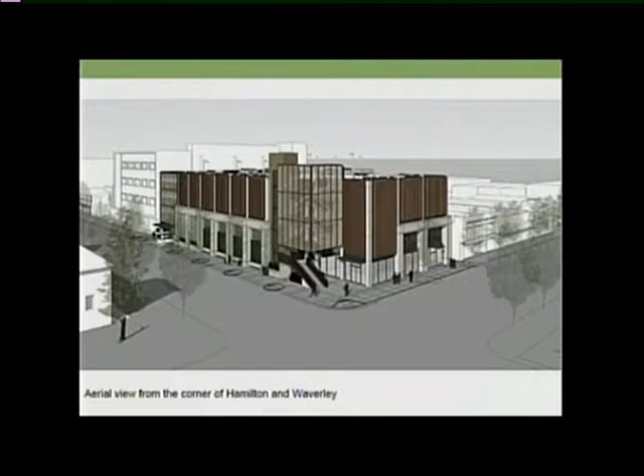And so this is the architect's design for the parking garage that was presented at the last ARB meeting on February 15th. The design, just so you know, is not finalized, it's still in flux. So this is where it stands at the moment, right, just to clarify. Right, and I'll explain a little bit more about that.

This is a different view from Hamilton Avenue, and from Gilman, looking at the vehicle entrance there. And this is, I think, a future potential inclusion of photovoltaic panels, which will not be part of the complete building when it's done, but it's planned for the future.

Who's the architect? Ken Hayes, yeah, in partnership with... God, now I'm blanking, but is it Watry Design? Watry, yeah, Design.

So the project goals for the public art for this building are to integrate artwork that reflects the character of the downtown corridor and increase wayfinding.

So after an artist selection process, Amy Landesberg was chosen for this project. I should say, going back to the previous slide, though, for a second, please, and back one more.

At the February 15th ARB meeting, members of the Architectural Review Board thought that this design was too uniform. A couple members referred to it as looking like a prison. They thought it was too vertically linear and very uniform, as if it was all one big block. They wanted the perforated screen to be more beautiful and more complex, and that's where the public art can help.

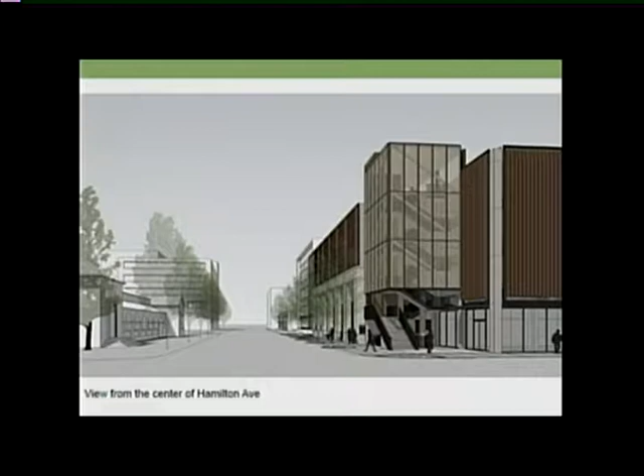Where the AT&T building is, right next door, that's that alley where... which is this building. Another comment by the ARB was that the vertical staircase, the enclosed staircase, was too large.

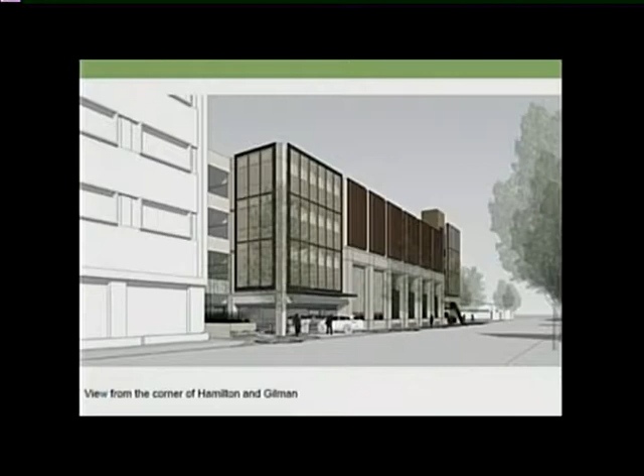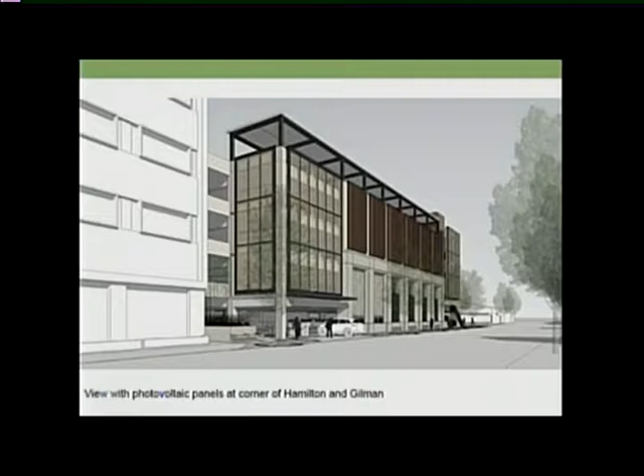And so this is potentially going to be reduced in size. They intend to reduce that in the next iteration of the design, but that hasn't happened yet.

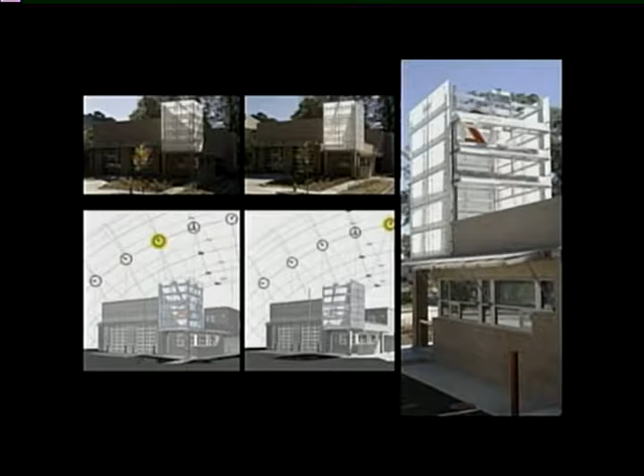So Amy Landesberg was chosen to be the artist for this project, and we have a few examples of her previous work, which shows her use of sunlight as an element that changes and animates her work at different times of day and also different times of the year. Her work will look different depending on how the sun hits it.

Also showing here in this piece her use of patterns, using man-made materials that mimic movement and patterns in the natural world. These are the Hyundai taillights, right? Yeah, this is a rental car parking garage at the San Diego airport.

So next, we're going to show you her conceptual design for this downtown garage project, which she entitled Tapestry. She's put a lot of work, a lot of time and effort into developing her design.

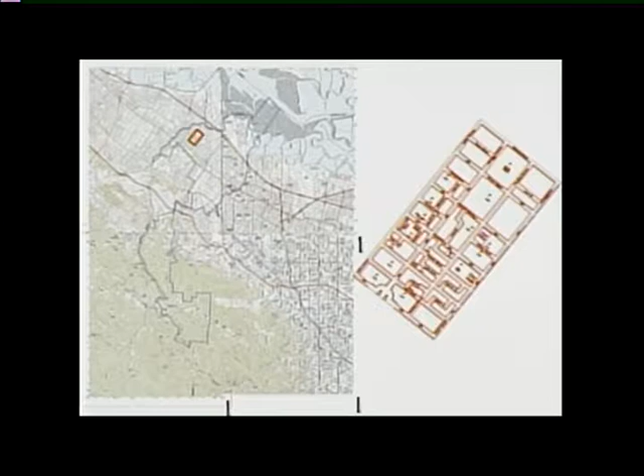I also just want to clarify, as we go forward with the renderings, they're concept renderings, so they're sketches. There may be more elements, fewer elements, but it's really just to present the concept. I just want to throw that out there as well.

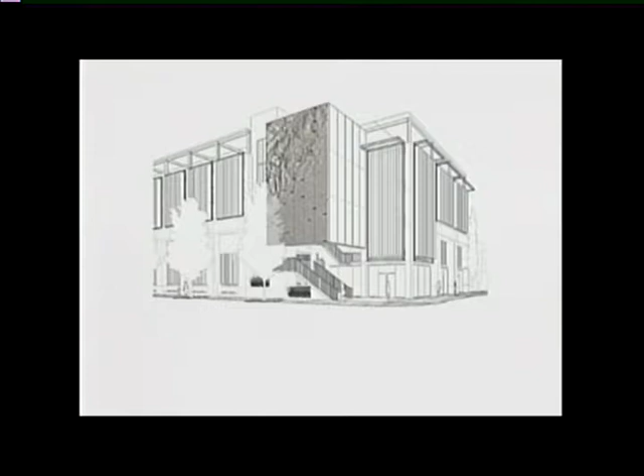Elise and I requested that she somehow make this more unique to this particular site, to the city of Palo Alto, which I think she's successfully done.

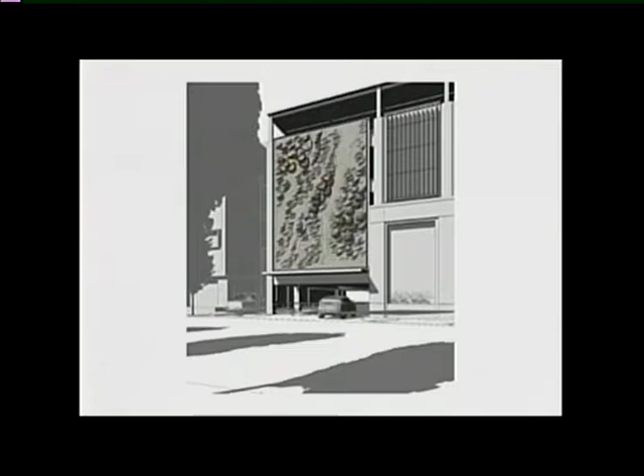And so here they are above the vehicle entrance and above the staircase in both views, and then finally wrapping around the enclosed staircase.

We really feel like this breaks up those vertical masses that the ARB objected to, making those oppressive lines something much more complex and beautiful, which is something they specifically requested.

I feel like it stretches her budget of $190,000 really far to cover this enormous area, and provides wayfinding in terms of making this a really unique, distinctive, recognizable building.

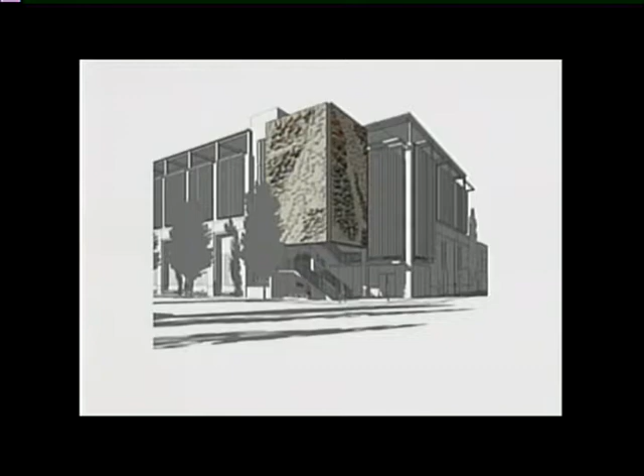So what we're asking this evening, keeping in mind this is a sketch—the number of elements may go up or down as we get into detailed design and get all the estimates, and see how much of the construction budget we might be able to leverage to help with the art.

So we wanted to bring this to you for approval to move forward with more detailed design, and to gather any input or feedback that you might have that we can carry back to the artist as we get into more detailed design.

Is this Cal Ave? No, this is on Hamilton. This is directly across from the post office building, next to the AT&T building, and there's the church on the other side, which, when Amy went into it and saw the stained glass, inspired her to want to incorporate glass into this project.

I really like her design. I think it ties together the wayfinding they were talking about with the maps, and I think she did a really good job on the maps and how to put them up there, and the colors and stuff, so it's gonna be visually striking.

One question I have though is those fins - can something be done with those fins artistically? Can they be movable, something? Are you referring to the fins on the other part of the building? Yeah, those brick red fins - because of the constraints of the building, and there are other adjacent buildings right behind it, it has to be open, otherwise it has to be mechanically ventilated, which drives up the cost significantly. So some of that is to mask some of the parking.

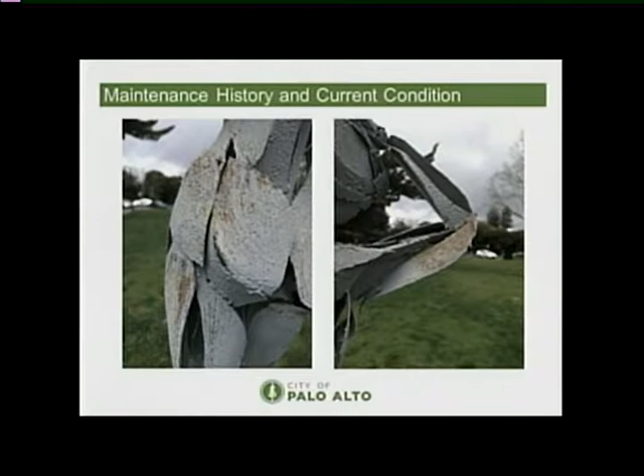So we reached out to a contractor whom we worked with in the past on a similar project and obtained a quote of $7,000 to install a new modern drip irrigation system and install new landscape around the piece. And here are a couple more detailed shots with affected areas. This slide shows that triangle which will be modernized with a new irrigation system and a new landscape around the piece.

So today we are here to ask the Commission to approve funding for this irrigation landscaping project. Thank you.

I was just gonna add that if you notice the light there, the light has been an issue because they try to mow that area and they always hit it with the mower, and we have to get electricians out there to rehook it up. So by putting the new plantings in, it will end that cycle as well.

The light will be protected as well, and we'll work to install a new light fixture in front of the sculpture. Okay, so new plantings, landscaping, new light fixture, and then also we're conserving the piece. Is that in that bid as well? So, right, the scope of $7,000 covers just the new irrigation and landscaping around the piece.

Currently, we are reaching out to a number of metal conservators and professionals to provide us with a quote for the conservation project of the piece, but that budget will be much lower, much smaller than this ask. Okay, and what did we pay for the piece back in 86, or was it 76? 76. I have to consult with the archives.

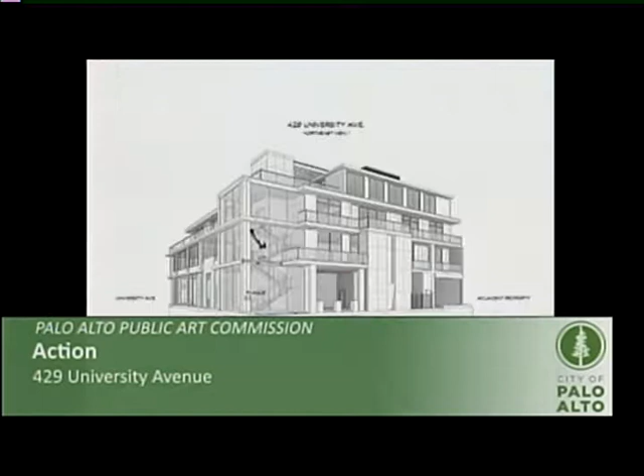Does the retail wrap all the way around from Kipling through University? Not all around. It goes up to that portico, which is the entrance, the lobby to the offices upstairs, as well as to the elevator going up to the apartments. So the retail stops at the portico.

So it does wrap around the corner a bit, like the first third of the building? Exactly, maybe a little more than a third, maybe half.

How did you decide on the placement of the piece, to do it there as opposed to closer to the entrance on Kipling? Well, here's the deal. First of all, University Avenue is kind of out, the real estate is just too expensive to do anything there.

So there were two choices. When you attached it, you attached it above grade, and that was a tricky move. The other option we presented the artist with was a balcony right above the portico entrance to the building, and we suggested he could put something there if he wanted. But he wanted something more open, less constrained, and he loved the corner because it's open - it's great, so the piece can take flight from there.

In fact, he called the piece Avigation, which he thought was reminiscent of aviation, navigation, finding your way, discovering new things.

So if we're okay with the location, then we can go back to the views of the artwork. I wanted to see the picture of Albert first.

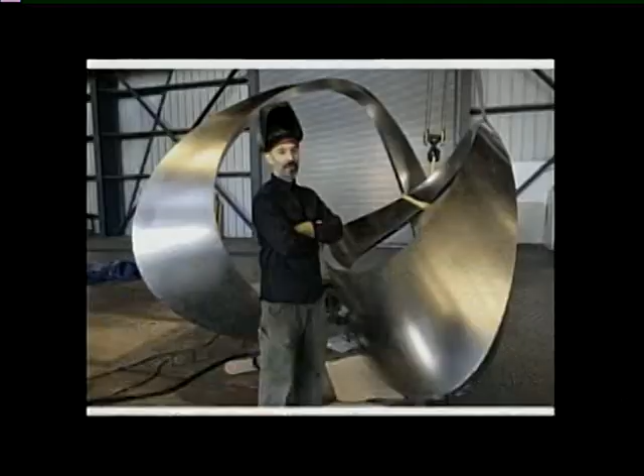This guy's a character. We discovered him because we originally approached Bruce Beasley, who I think you're all familiar with his work here in the city. Bruce was game in the beginning, but then he thought about it further and said, I'm going to decline, but I can recommend Albert. Albert apprenticed with Bruce, so he knows the Bruce Beasley techniques, but he has his own style - he loves to do 3D modeling on the computer and stuff like that.

That's our artist. He likes to make shapes with metal, steel, bronze, aluminum. Okay, now let's scroll down to his work.

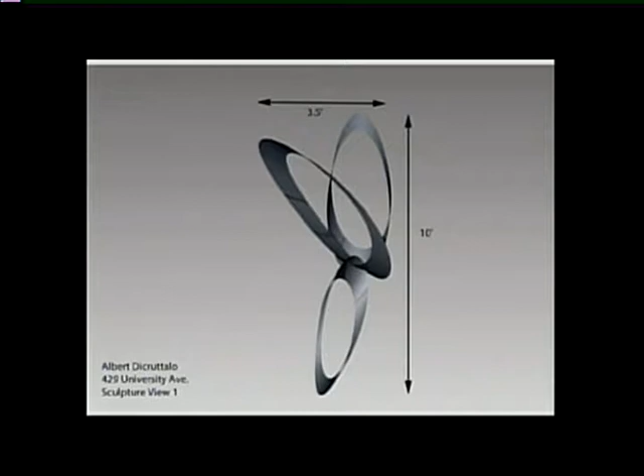So that's our first view of the work when the artist presented us with it. He said, I'm looking at interlocking wings with holes in them. And I said, well, that's interesting, how big is it going to be? He said it's about larger than man size, it's going to be 10 feet tall, and it'll be impressive in the corner, especially as you walk closer to it.

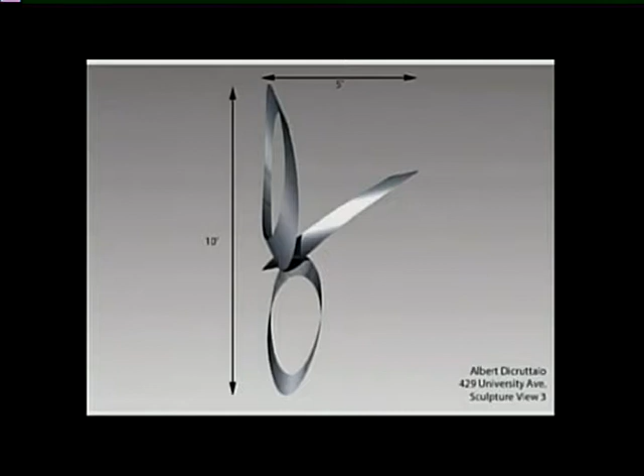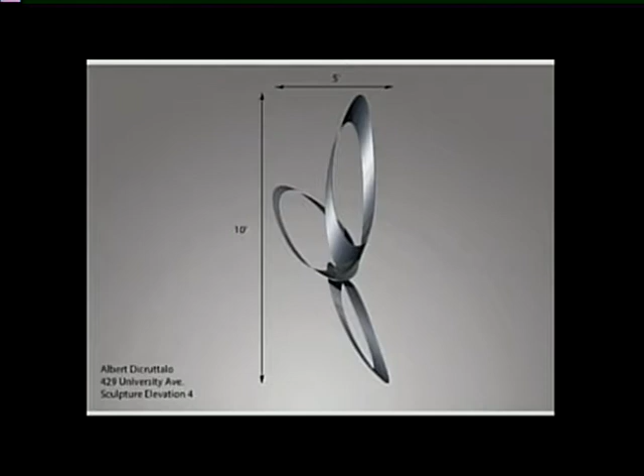And if you're going to suspend it in air, you can see it from all the way around as well as from the bottom. As an added bonus, people going up the stairs can see it from the windows also and get a different view of it. The other nice thing about the location is that stairwell is going to be lit up all day and night for safety, so there will be a glow from that jewel box onto the art piece.

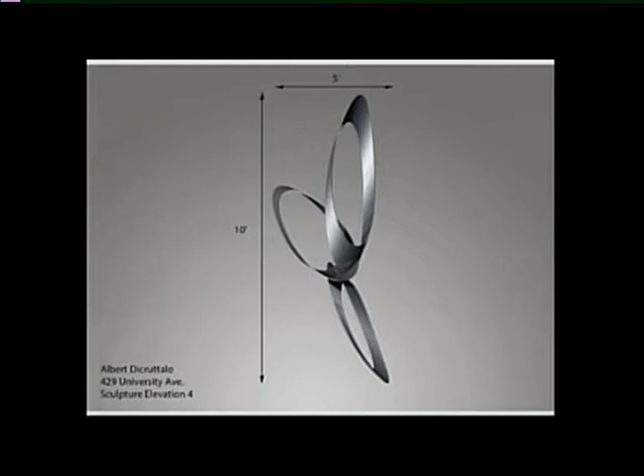It'll be casting shadows on the street as well. This corner, because of its location, will get afternoon sun and a little bit of morning sun, depending on how big the trees grow and exactly where they're placed, but it'll get quite a bit of afternoon sun. So that was the thinking behind the art piece and the location.

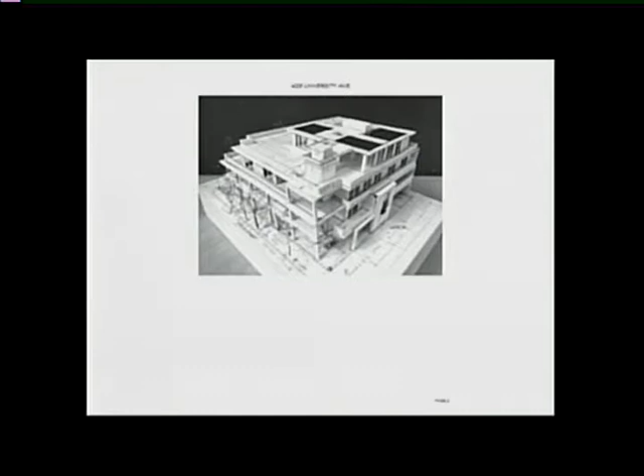Any questions about that? It's not still clear to me the exact orientation of it. I'm guessing that Albert hasn't worked that out yet, but he will - how exactly, which piece sticks out where. But that's the idea.

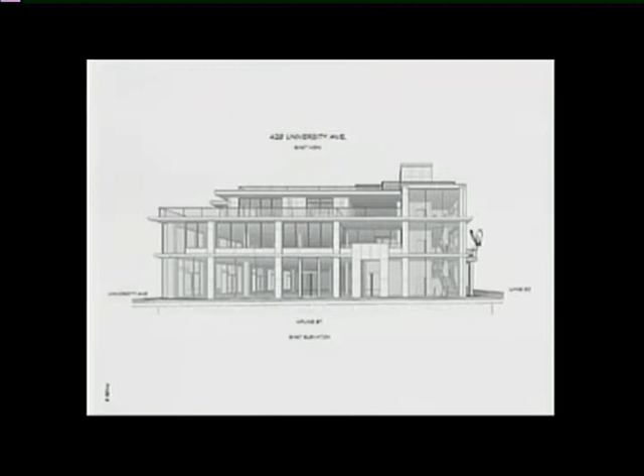As far as the colors go, the first and second floor have integral color concrete. The third floor and above will have a different color, so it's sort of an architectural bump, a feature that says here's one function, and then here's something else that recedes a little bit, is set back, with a different color and a different function.

I'm thinking this building is gonna be a lot different than a lot of the buildings, although things are starting to change in downtown Palo Alto.

That is correct. But I feel like if this was meant to be a destination, like how would the artwork work, if you were to say go to this piece, or meet at this place. I'm just kind of overthinking it, like meet at the red ball, or the gigantic red balloon. I think this could potentially be something like a destination, but what is that destination? I don't quite see it yet.

My initial feeling is that the building itself is artwork. This is a building that has no pretense, there's no layering, it's very honest. The concrete is the structure, there's no sheetrock in front of it or anything like that, no stone cladding. The glass allows you to look in and see the bones, see what's going on inside. I think the artwork punctuates that because it says, look, I'm taking off from here, I'm different. The building is all straight lines, all concrete and steel, and I am soft curves, I'm not solid, I'm in motion, that sort of thing. It punctuates the transition between University Avenue and the rest of the block.

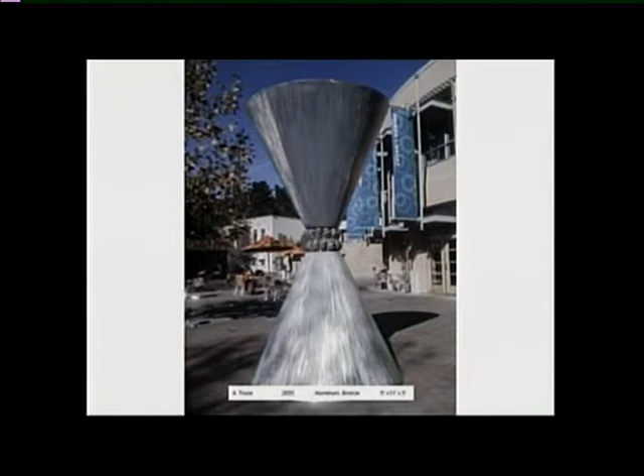I think we have some slides of other works that he has done. I'm also very excited about the location, because as in the parking garage at Hamilton and Waverly, the pieces that Amy put are all second floor and up. So it is a little bit different. Here all these arts sit on the ground and they're great, but in downtown, at University at this location, you have to be creative.

There were things that we hadn't thought about, things like, geez, what happens in an earthquake? Will this thing swing enough to hit the glass? And what happens in a strong wind? You're talking about these things being like propellers. If a strong wind makes it move, what's going to happen? So we had to hire an engineer who engineered all this, and I think it's going to be worth putting it there.

How is it being attached to the building and keeping, accommodating the concerns that you mentioned? From what I've seen and understand, from the ceiling slab, that is the ceiling of the first floor and floor of the second floor, there will be an arm sticking out. That arm is going to be embedded into the concrete, so it has to fight for space with all the rebar. The inside arm's gonna be an I-beam.

I don't know if you got a sketch of that in your package. We didn't give them the structural calculations, I don't think you needed that level of detail. There are 30 pages of calculations and stuff to get that done for the arm.

So it's anchored into the 12-inch concrete slab, and that's why the sculpture needs to be resting on that one point. Once the concept is approved, we can put the steel inside the slab for future production of that piece. The piece only touches and sits on this one point of attachment, no cables. It has to be rigid enough.